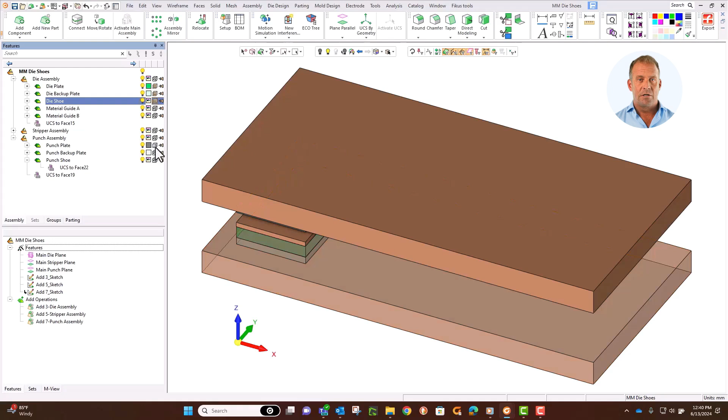We now have quite a few plates in our die set. Let's visually change some things for clarity. You can use this option in the feature tree listing to see things in wireframe or transparent mode. Open the setup on the strip layout tab, and we can change the dimensions of the strip we've been building to values that we will use in this instance.

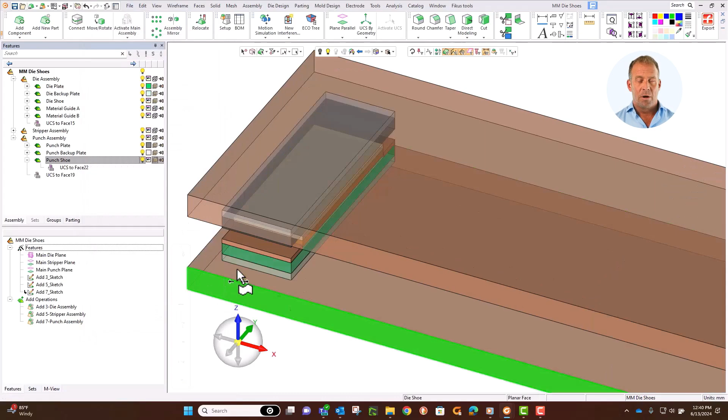We'll update the plate sizes and the thickness of the coil. Let's make sure everything updates and everything is attached. On inspection, the widths and overhanging margins updated and the shoes moved. So it looks like this has been successful.

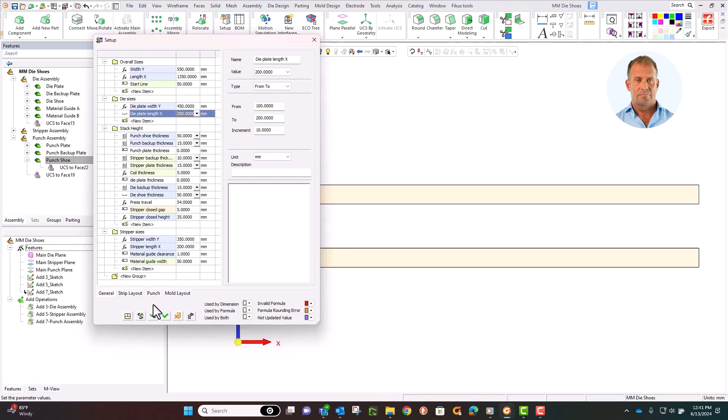Open the setup on the General tab. Let's make a quick adjustment to these values and change the die plate length from 150 to 200. That test was successful. Now let's change the maximum value so we can select the size that wasn't in there before. Let's make the step size bigger too.

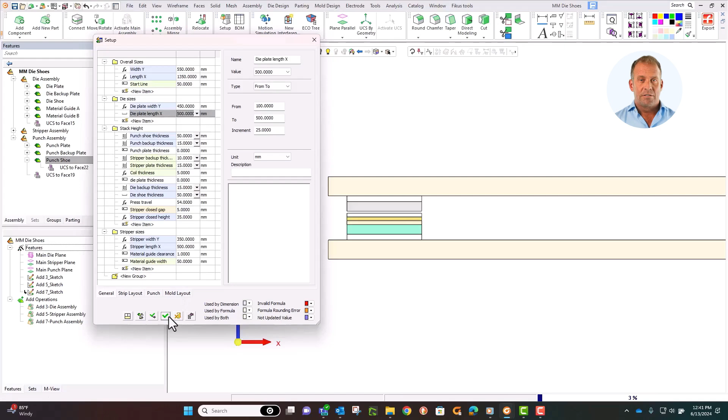Now you really can see it. So you could really push these values to see how flexible things are, how robust it is, and when you're satisfied, save it. Now we can test this assembly using a real strip and check if it finds all the values that we worked to in the strip.

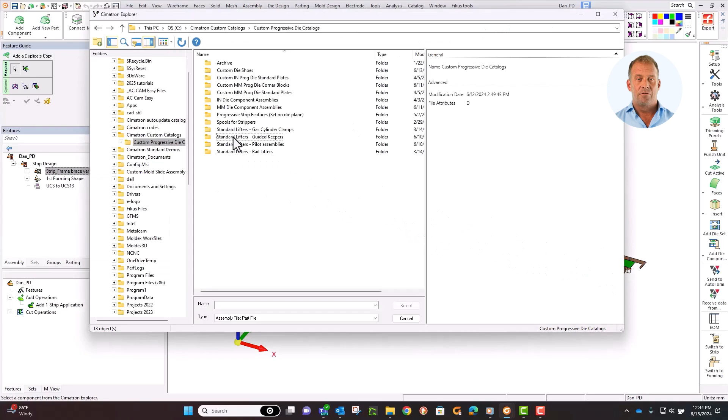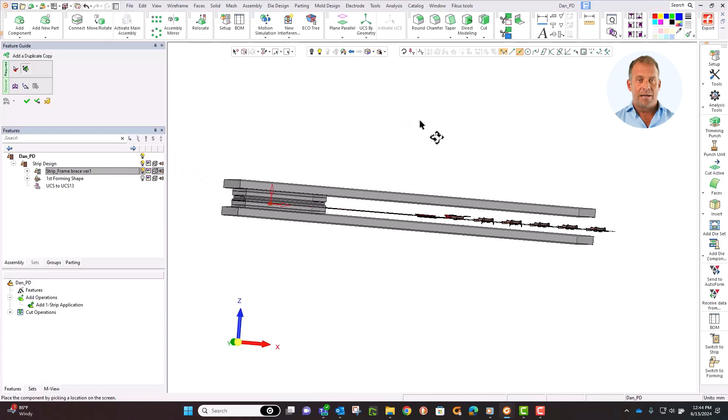Open a strip file and add our die shoe file as a duplicate. When we built the die shoe file, we located all the UCS at the beginning of the strip, so let's position it at the midpoint on the end of the strip. Initially, it looks good. The shoes have sized up to the correct width and length, but you can see the strip is protruding at the end.

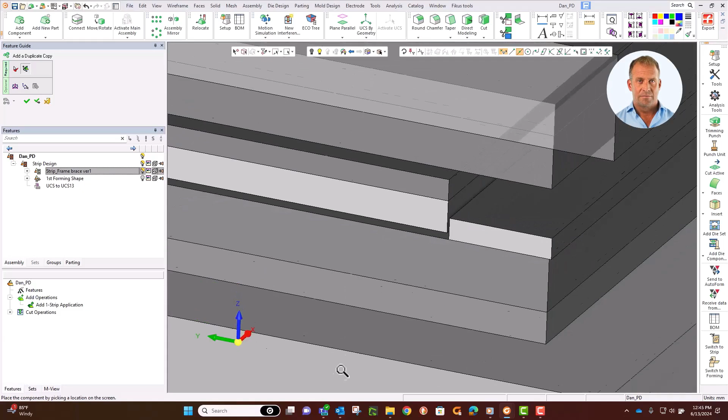When we look closer, we can see the strip is out of position. Our gaps and distances are good, so what we constructed is working, but the positioning is incorrect. The issue is that the file uses an active coordinate system, and that has to be active in the die shoe file when we save it before we place it in this file. This is relatively simple to fix. Close the file and go back to our die set assembly.

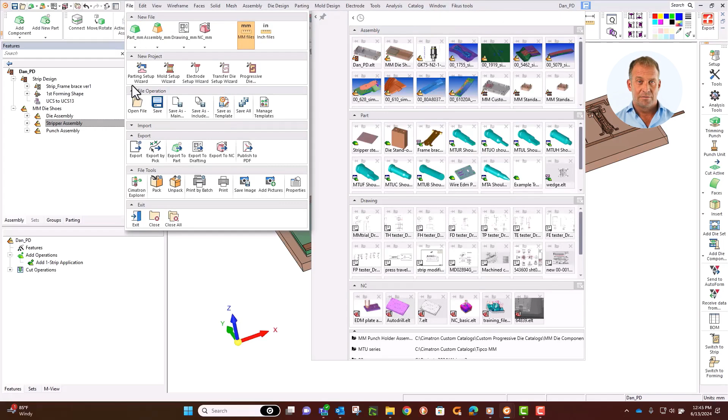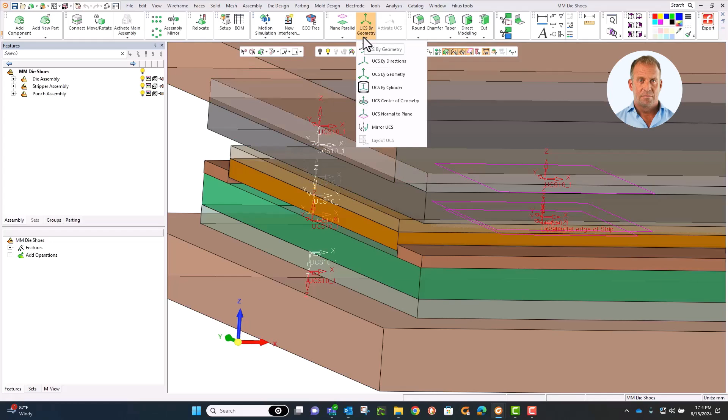Let's take a closer look at our datums and datum planes. We can see the active coordinate system is shown as the red datum with the 3 purple planes, and that is where the strip was positioned. To fix this, we will activate the main assembly and then create a new coordinate system. Select UCS by geometry. Place the new UCS on the leading edge of the die plate by selecting the midpoint filter and orient the x-axis along the length of the die plate.

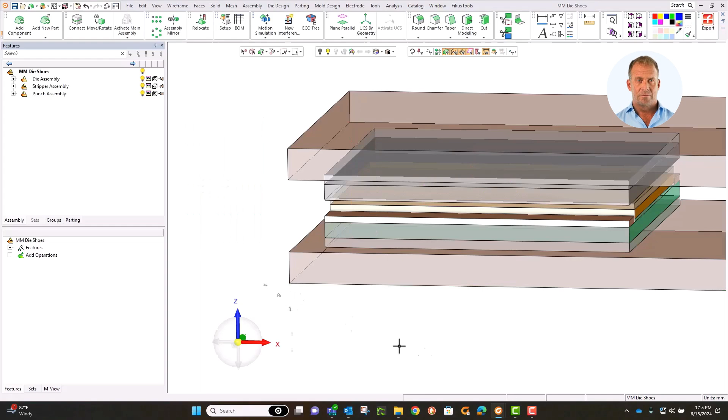Let's give the UCS a very clear name. And make sure it is active before we save it. And we need to save the file. Hide the datums for clarity. Reopen the strip file. And click Assembly, add the duplicate, and pick our die shoe assembly file.

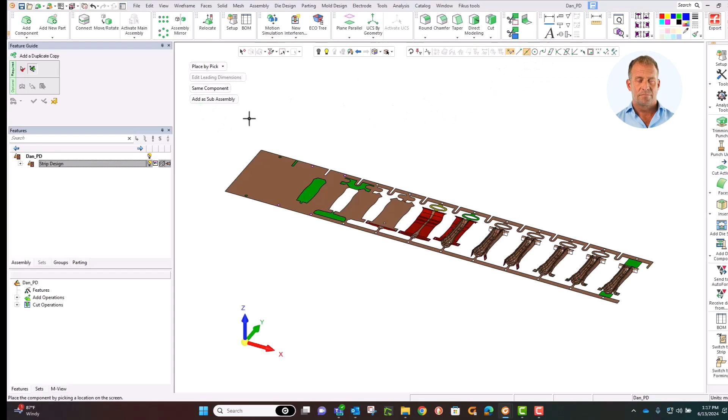Place it by pick as a subassembly. Select the leading edge using the filter for points. And select the midpoint. And pick the leading edge of the strip. This immediately looks better, so let's check all our gaps and our clearances. Click OK to accept.

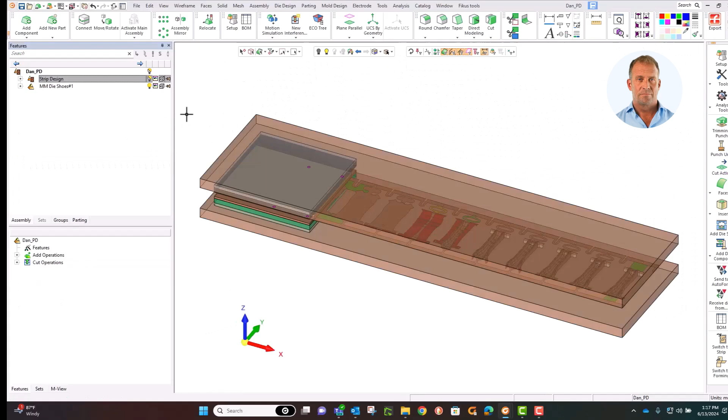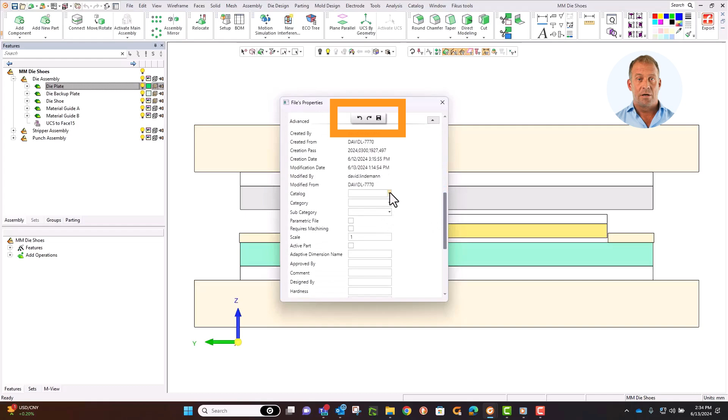Close the strip file and we will continue in the die shoes file by assigning properties to each of the plates in the die set. Select a plate in our tree and right-click to go to Properties. Here, we will assign such things as Material, Catalog, and Category. When we start making changes, you can see the 3 buttons for Redo, Undo, and Save become available.

Scroll down in that catalog listing. We see that these are all our supplier catalogs. If there is one already in there, we can select it, or we can create one by typing it in the field. Do the same thing in the main category, and add a subcategory as an identifier. It's a die plate, so scroll down until we find die plate and make the assignment.

Add the rest of the parameters, select parametric, mark that it requires machining. We want it on the BOM, so do not select Ignore. The short type is important. When we assign it as a die plate, we identify that we will need to cut relief holes that we have saved.

Let's go back now to the next one. Work your way down the list, right-click on each plate, and assign the properties. Select the material. You can see these dialogues can be edited at any time. This is not a sequential process.

This is a backing plate, so we'll look for die backing plates. Mark the boxes that we need. If you want, you can add the hardness and the heat treatment as well. All that information will appear on the bill of materials.

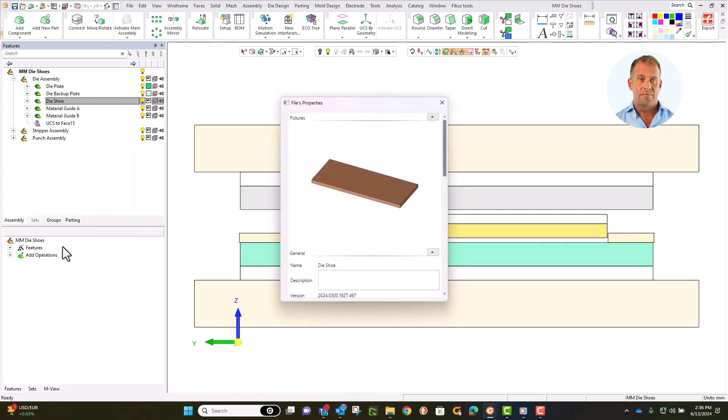We don't have the material we need for this shoe. When we look on our global material table, it isn't here either. Ideally, we would update the global material table to make it available for all users, but for now we can type in the data.

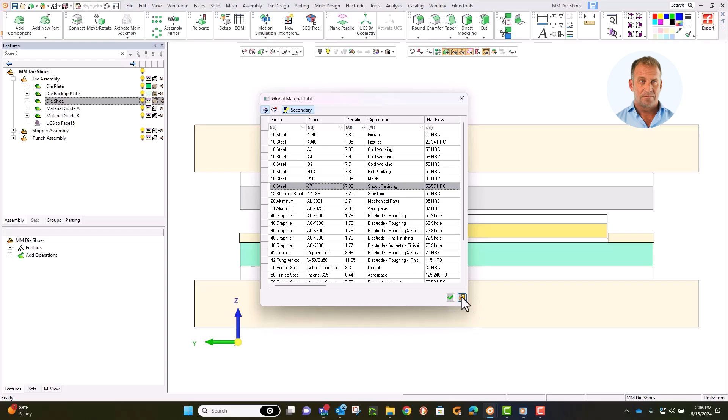For example, this is a hot rolled steel burnout. Update catalog, category, subcategory, short type. Do the same for all the remaining plates.

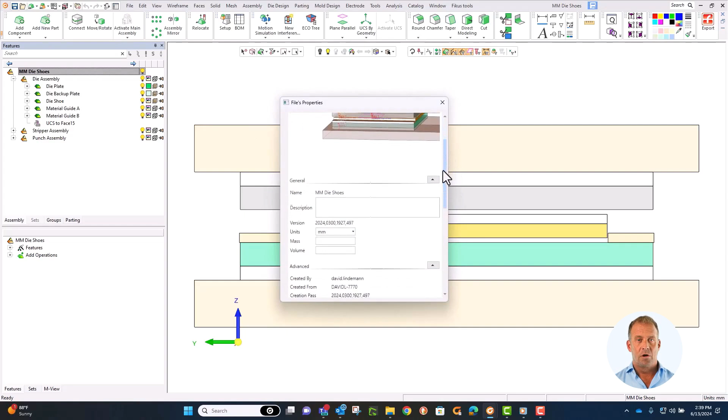Now let's assign properties to our main assembly. We will assign some properties that will be used by the die design guide. We'll come back to this later. For catalog, type in die sets. In the category selector, you can see there's lots of different types of tools, including die sets, punch units, forming units, and many more. We'll pick die sets.

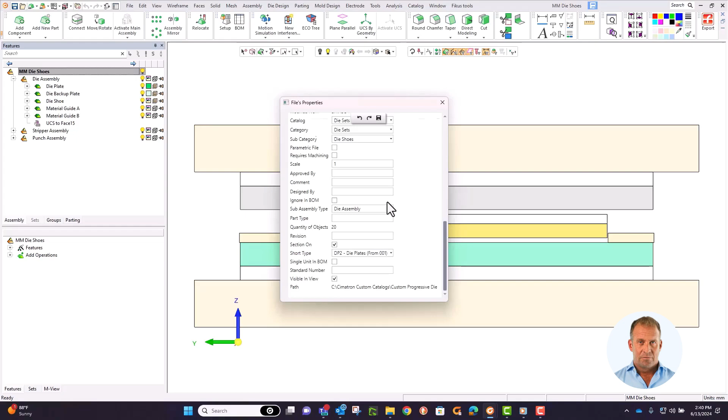Set the subcategory as die shoes, subassembly type as a die assembly, and set the short type as DP2 die plates and save. Now we can save as and give the file a different name. We started with a file called die shoes, but that doesn't describe it well. So let's call this our standard millimeter die set. Now we are creating some standardized naming.

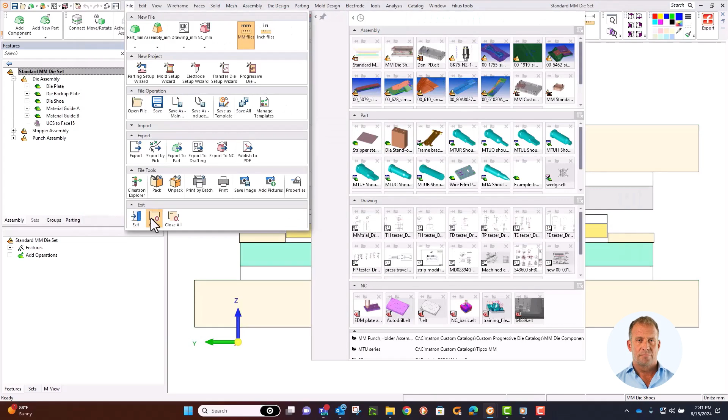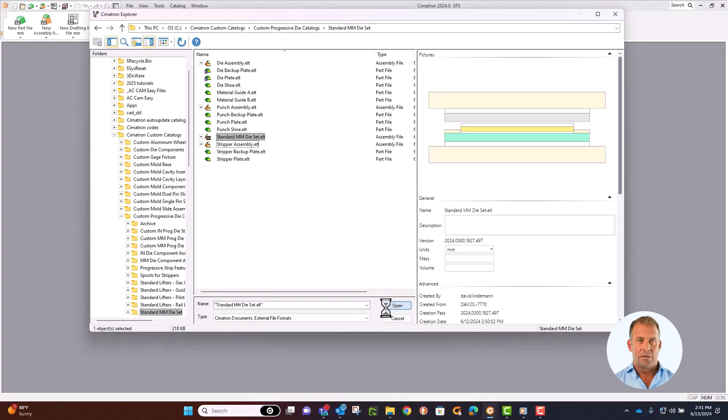Let's close this file and then open the browser to rename the directory. Now it fits nicely among all the other die components that we've built up over time. Open the directory and you can see the icon for the main assembly looks different to make it easy to find. Right-click on it and select Delete Unused Files and select Delete Unused Files again to get rid of assembly names or components that aren't attached, such as components that were added and then deleted.

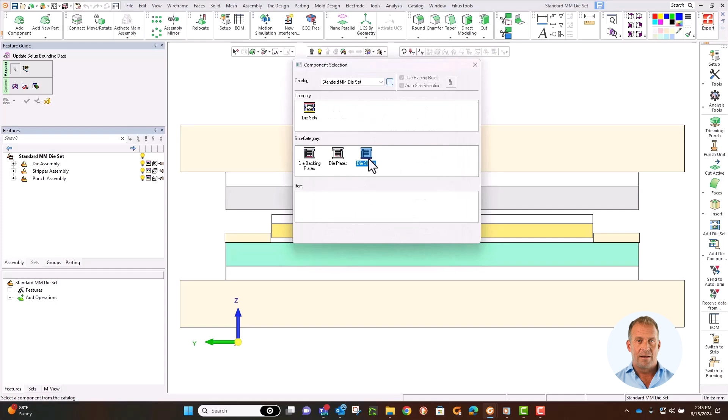Open it one more time to check our standard millimeter die set is working right. Right-click on the top bar and we can now open up the die design guide. Click Add Die Sets and then click the Browse button next to the directory drop-down. Browse to the new folder that we've built along with our subassembly in the die set. This is shown here because we assigned properties to make the components available in the die design guide. Here you can see the die shoes and the actual die set we created.